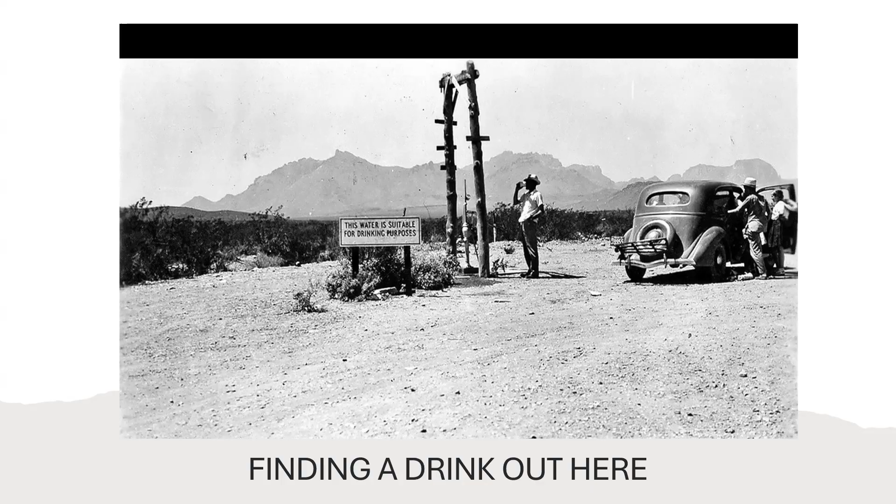This is an old TxDOT photo. Out here, there are even well service people who have helicopters, just because of the distance to get to the wells. They can take a control box and a multimeter and go out and diagnose whether it just needs the reset button, or if you're going to have to come out of the hole. This is a guy over near Dryden.

As Scott was talking about in El Paso, all these little towns out here really started out fairly simple on the water. Sanderson was a railroad town. In the beginning, there was a fellow named Wilson that went in. They tried multiple locations and drilled a bunch of dry holes, and he finally hit right there in town on the edge of Javelina Hill. So they put the whole water system right there. You can tell multiple wells close together. But before that, they were literally hauling water in barrels to people's houses, sort of like he was talking about in El Paso.

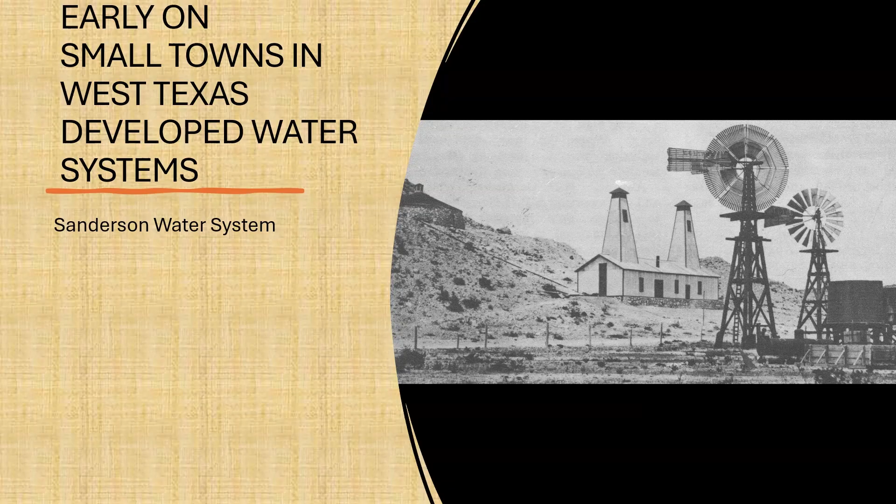Another good source, as most of you know, being in the geo class, is that many times understanding the surface geology, you can make determinations about where you're going to start. You can look for structure, which in fractured bedrock is always an advantage, and investigating this on the front end can really save you a lot of time. It can help guide where you're going to try to locate the well.

Out here, another thing that makes West Texas different is that you have all different kinds of water bearing zones within a fairly small area. So if you're based in Alpine, or Sanderson, or Terlingua, whatever, the wells can be in any of these water bearing zones. So we talked a lot today about the carbonate aquifers and the volcanics, the alluvial aquifers and the bolsons. You're going to have different drilling methods for each of those, ranging from some of those alluvial wells or things down along the river.

I mean, you could be cable tool. Some of these other projects can be air rotary. A lot of them are going to be hammer. Understanding what it's going to take, what type of equipment it's going to take to drill the hole, also what the hole diameters are. Again, if it's a public supply well, once you start trying to drill a large diameter hole in some of this alluvium or these bolsons, it can be an adventure.

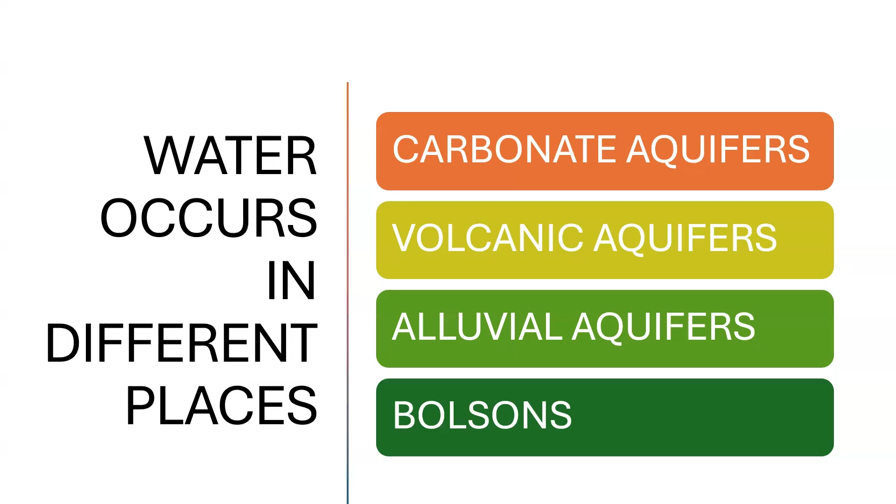Once again, a lot of you guys are very experienced in doing the groundwork ahead of time. Water Development Board groundwater reports—Rusty and I were talking earlier about a lot of this work being done back in the 40s and 50s, and they generated a lot of really good reports, well records, things like depth and material encountered and water levels. That information was really good, and those reports were really good. So accessing those, looking on the Water Development Board water well database, I think everybody in the business here knows about researching that. The information is sometimes very good and sometimes it's not, but at least it's a start on trying to figure out what you're going to get into.

Going out to these ranches and talking to them, looking at their owner records, they range from everything. Some of them have wells that were drilled back in the 50s and 60s. They'll still have the original receipt showing depth, materials that were placed, records of pumps they've pulled, equipment that's been replaced, wells they've plugged. All that information is available. Some have absolutely nothing—if they've changed ownership and things like that, a lot of times that doesn't convey.

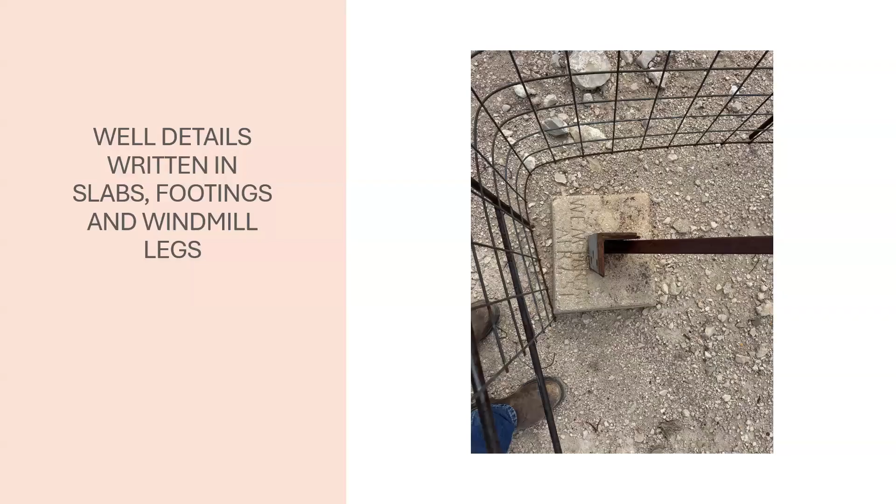In fact, most of the time it's not there, but sometimes you're lucky and you find something. And of course, as always in this business, it's talking to people. Talk to the guy that's been operating. A lot of these ranchers out here lease these places, so they came in after the water system was already built and had been operated for 40 years before they got involved. But they know which wells are operational, problems they've had with them, and kind of what to expect in a certain area. Sometimes they don't know anything, but it's always nice to visit with them.

Then you call Joe Vickers, right? Call Joe and say, hey, what do you think? This is where we're going to work and what we're going to do. And he's always a wealth of information. He's a fellow over in Central Texas who has done a lot of work all over the state, a real wealth of knowledge.

Now I want to talk about a project I got involved in years ago, down in South County, South Brewster County. They put together the Study Butte Water Supply Corporation because they had no centralized water system down there. I guess there was one old well near the Starlight that supplied basically the whole ghost town, and people hauled water in barrels for a long time. As the population was growing and businesses wanted to grow, they got a loan or a grant, I don't know which, from USDA to drill a new supply well. That was in '98, and we got the contract to go down there.

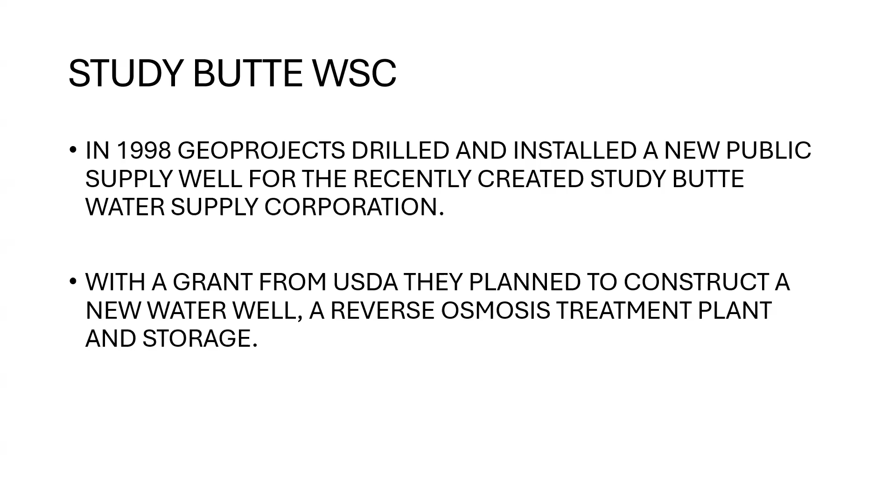Again, there was a lot of good geology information because everybody likes to go down there and look at the geology, but there weren't a lot of records about wells and what to expect. So it wasn't a wildcat, because people did know some things, but nobody had drilled a well there and hit and made a public supply well, and they didn't know anything about volume. So they got a grant to drill the new well, build an RO plant, and build a couple of storage tanks.

Several people, Kevin included, have talked about the stratigraphy down there at the surface where we drilled. We started in the Boquillas - I don't know which member of the Boquillas it was - went down, and we anticipated going through the Buda. Normally you can tell when you're going through the Del Rio, because the material is significantly different than the Buda. Then we were going to complete in the Santa Elena.

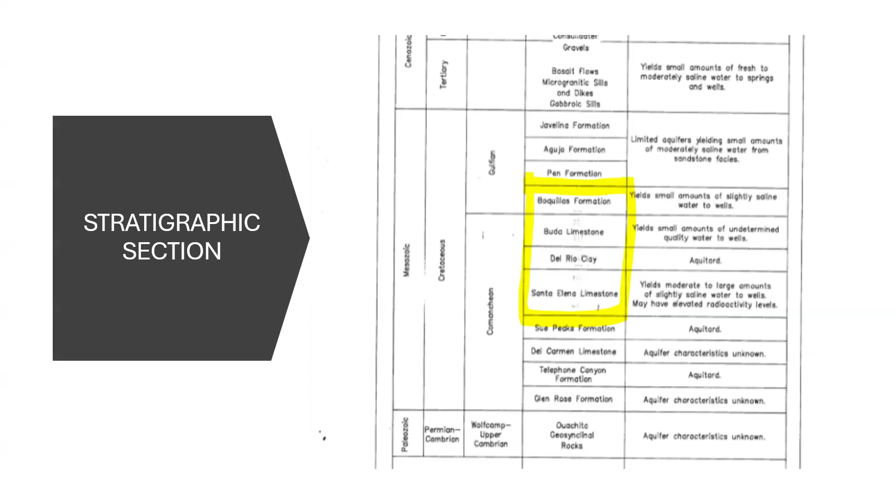So that's the section. They bought a piece of property behind the Starlight, and that's where they were going to build everything. Everything had to fit right there on this really small piece of property, and they had no power there when it started.

Well, we're starting in the Boquillas here, right? So there's something going on structurally. And so there's the Terlingua Fault. And so we were looking across, and you could see the mouth of that. And that was going to be what turned out to be about 800 feet below where the rig was set up.

So we drilled a 6-inch or 6 1/4 hole to 1160, which was, I think, the contract thing. Well, we hit water about 900. We never circulated very well. It was fairly weak on returns. We didn't have any trouble making connections or any problems like that, so we weren't afraid of getting stuck.

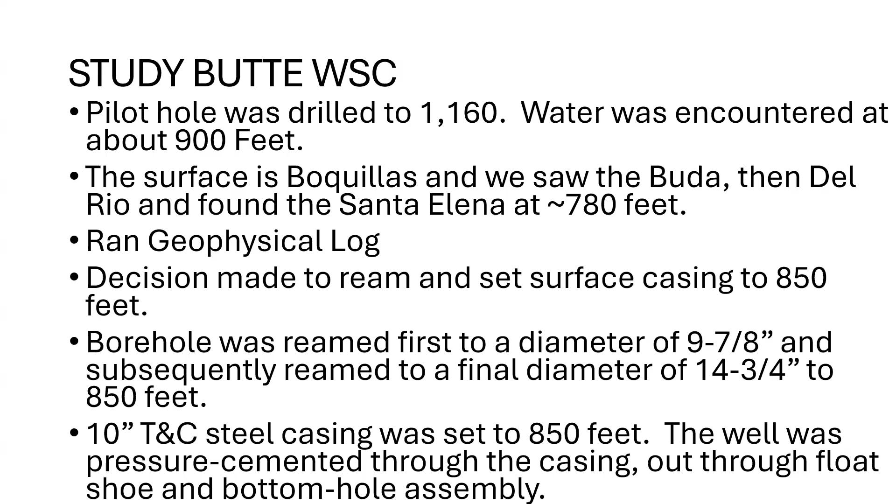We drilled it with a 9 7/8, and then we came back with a 14 3/4, and then we ran that 10-inch in there and cemented that. Of course, all that fractured bedrock down there, there's no returns. And so top off was an adventure. We put a lot of cement as top off on the backside of the casing. After the cement cured, we drilled out with a 9 7/8, and we went on down to 1160.

And again, we had not a whole lot of returns, and so we didn't really even know how much water it was making. We were running enough back pressure on the system we knew we had water in the hole. We just didn't know how much, or if it was going to meet the capacity that they wanted for the system, which was, I think, 150 gallons a minute. So after setting the casing, cementing that, TD the well and everything, when we put the test pump in there, we didn't know what it was going to make, which is common out there. That's not unusual.

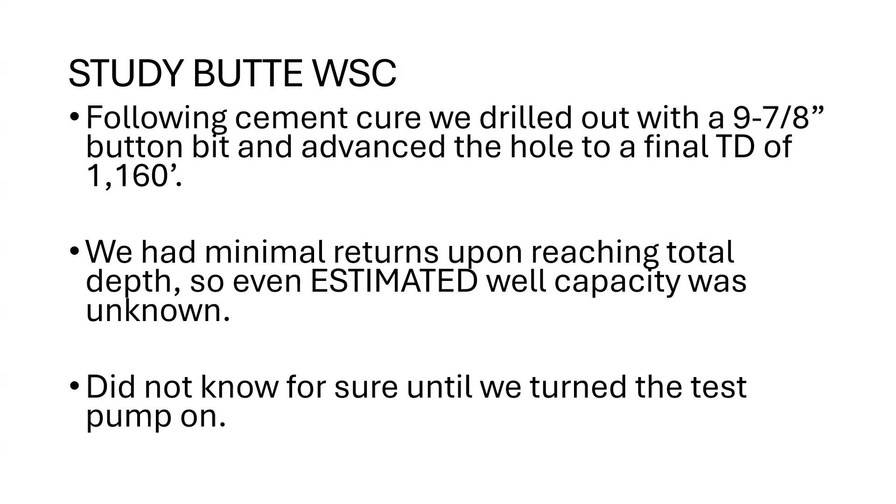So there's the state Texas well report, state well number. So the pumping test, we had to do the 36-hour because it's a public supply well, and they wanted to pump it at twice the design rate. So we went ahead and we brought the test pump to make the 250 gallons a minute. We set the test pump. I'm pretty sure it was on 5-inch drop, set that, and set it just inside the casing.

And we started the pumping test, and it turned out to be a good well. We had about 11, 12 feet of drawdown after 36 hours. And we found the water temperature at about 110, and that really became the biggest problem that we had to encounter, that water temperature and the crappy quality. I think it was like 2,500 TDS water. But again, right? Bad breath is better than no breath at all.

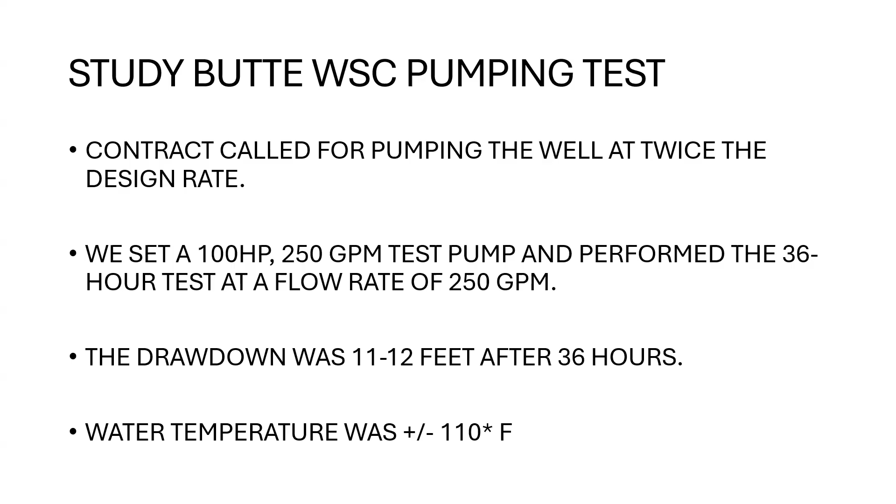And so we started coming up with our permanent pumping equipment design. We had taken into consideration that it was hot water and fairly deep. They wanted to use the permanent pump. At least initially, they were going to drive the RO unit with the well pump, which meant we had a lot of excess pressure at the surface.

So we ended up, it was a 100 horsepower motor we had on the test pump. So we ended up just derating the motor for the permanent pump. We just put the 100 horse motor on a smaller capacity, 125 gallon a minute pump, and that worked good. In fact, there's more to the story to tell you, but it turned out that instead of a bunch of wild high temp motors and things like that, an oversized derated motor, shrouded, was probably a better install.

And in that time frame, the variable frequency drive was just barely coming into being used on submersible pumps, and the power company required that we had a soft start, because if we tried to load that motor on that line, it was going to create a problem with Rio Grande Electric.

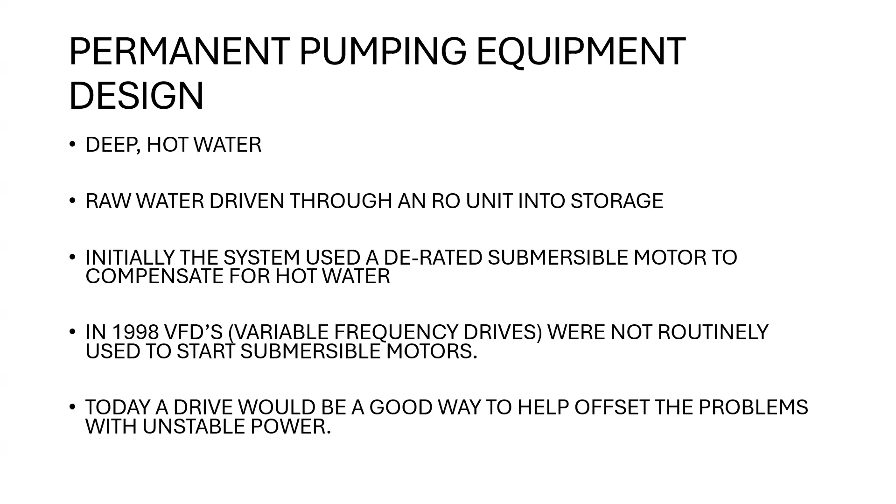So we get all this stuff, we get all this equipment, and we take it out there, the soft start and the pump motor. We pull the test pump out, put the permanent pump in there, and we start trying to operate this thing. And we had the soft start had protection on it.

And this is, you pump installers, you know what I'm talking about. The big problem down there is unbalanced power. So when it's running, the amperage pull on each of the three legs of the three phase is not equal or even close. And consequently, the protection on the soft start would never let the pump run, right? It started and run like 30 seconds and then it would shut it off.

So we get the power company down there, and the power company comes and they look around and adjust the taps on the transformer, and they do all this. We're trying to help you. We're going to get this thing resolved. And as soon as they couldn't get it resolved, then what they tried to do is to figure out how it was something we did, right? There's something wrong with our pump and motor.

And they take a set of, like an ohmmeter or a megger or whatever, and they say, oh, we detect a leak down hole. And just, once again, just trying to kind of put you off.

And so they had to put a generator down there. Of course, we ran fine on a generator, and we never had a problem. We didn't have a leak down the hole, never tripped anything. But just to get going, they had a generator for a while. And we used the soft start, which we didn't need for the generator. But anyway, so again, it was faulting out for current imbalance, and the system wouldn't work.

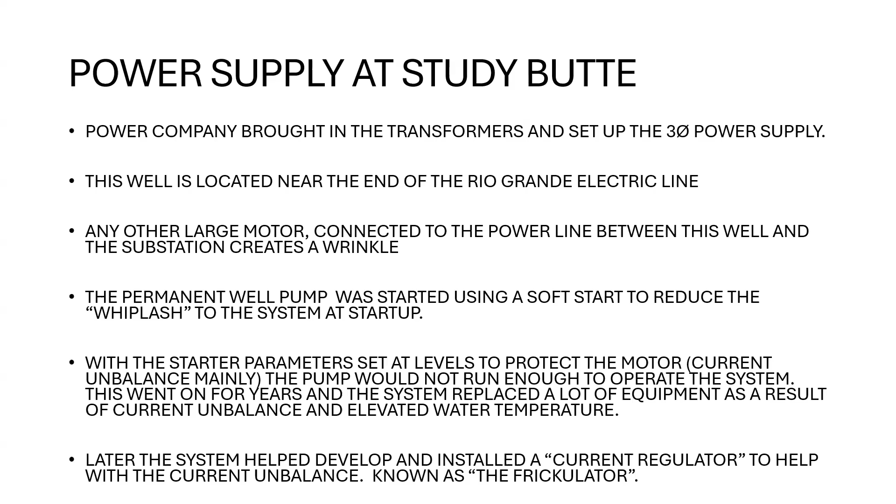So the system had a guy that was the president of the water board, a guy named Dave Fricker. Does anybody here remember Dave Fricker? He was an electrical engineer, and he was the board president, and he was just really good. He had all these patents in his name.

He comes out to the job site, we're out there putting the pump in, and he's telling us, I'm an engineer and I've got these patents and stuff. And everybody's looking at him, well, I think that's really nice, sir, but we're trying to get this job done. So at lunch, he goes home and gets the patents, right, and brings it back out to the job site. And he was one of the guys that patented the variable speed, like on a drill, like you pull the trigger harder and it goes faster.

And so these submersible motors, they're very sensitive, and there are two things they really don't like. They don't like heat because heat burns through the windings and they're shot and that's it. And then unbalanced power. And they had both of those conditions with the water temperature and the unbalanced power.

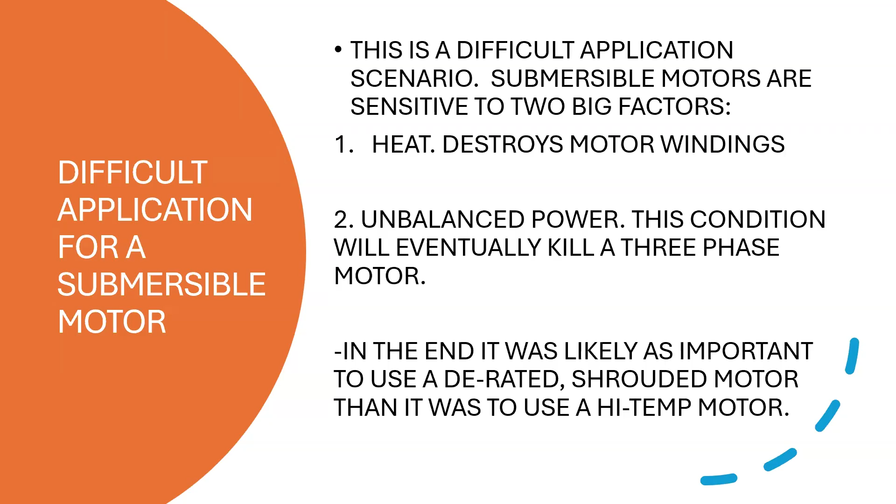So we went out there to pull that, and we got the elevators on it, and we pulled it up, and it pulled about 2 joints off of it, and the whole thing took off down the hole, the motor and the pump and the 4-aught wire that was tied to it, and went all the way to the bottom. We had to take a drilling rig out there. We fished that out, and we stopped work and said, what are we going to do now?

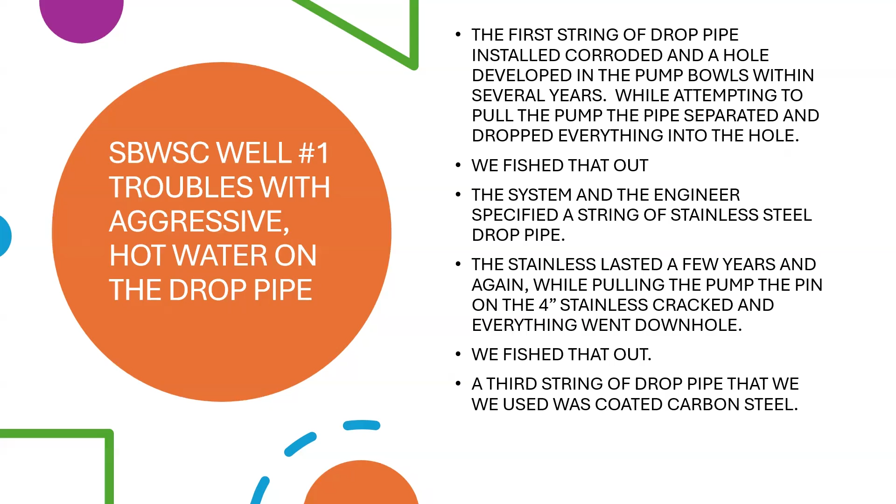And the engineer decided he wanted to put a string of 4-inch stainless drop pipe at 850 feet, whatever it was. And so we put the stainless in there, and that ran for about 3 years. And then another motor went out. Once again, same thing killing it, the water temperature and the unbalanced power. And we got that pump about 2 joints out of there, and it took off.

And so it was 3 things. It was the strain of the weight of the string, it was the hot water, and it was the chloride in the water that cracked that stainless. And so that's what happened. And that's what happened when it hit bottom. It bent all that pipe.

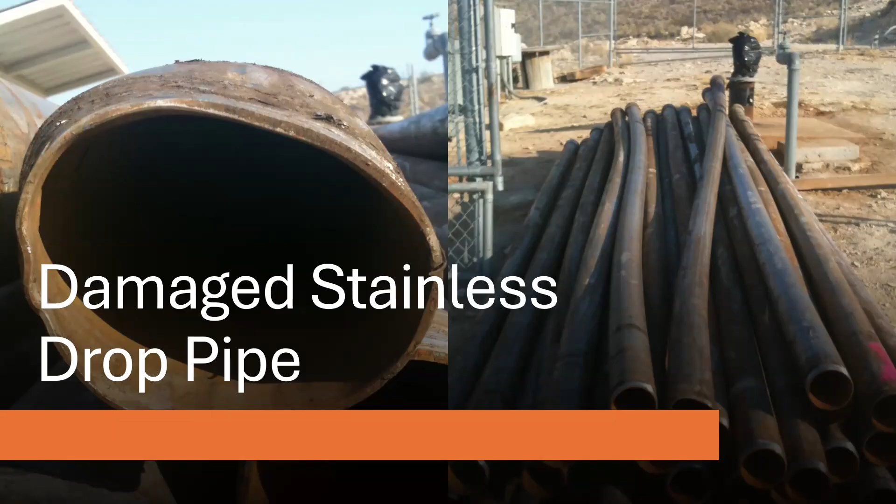So we put the coated pipe in there, and it's a real pain to put it together because, and Clark can tell you what a pain it is, the wrenches don't bite on the coating, and you have to have a special set of wrenches to do it, and you always nick it, and anywhere you nick that coating, then it just rusts right through and has another hole. You're back to just carbon steel pipe.

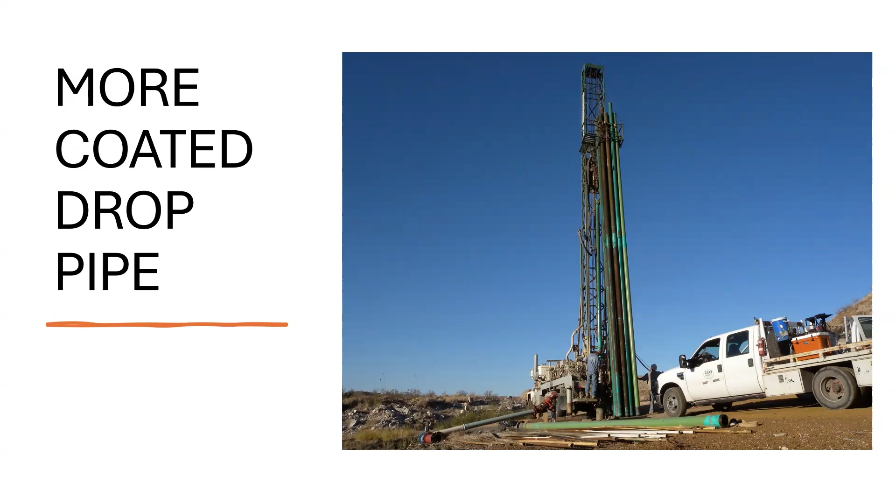So when we stopped going down there, that was the last thing that they were doing was the coated carbon steel. There's another string of it, pulled in doubles.

I'm not sure what in the interim on the starter side, on the electrical side, Mr. Fricker, because he got tired of the unbalanced power, he worked with a company. I don't know if it was Benshaw or one of those big electrical companies, and he came up with a current regulator that would take the 3-phase power from the power company, and it would smooth the power, and then it would feed the soft start, and that worked pretty well. In fact, that's what they were using the last time we were down there.

But at every turn in this project, it was something big. And again, you could probably say, well, on the design side, they should have probably done this or that or whatever. But why wouldn't you go galvanized? Well, galvanized it'd have a hole in it before you got home, right? There's no way it would work. And so it was a tough project, and I'm sure they're still fighting it. I don't know if anybody here has any knowledge about that system or how it's going.

But again, conclusion there, it's a difficult pumping environment. The maintenance will be ongoing no matter what you put in there. You're going to be pulling it periodically, hopefully not to replace the submersible motor. We did switch to a stainless fluid end, and we stopped the corrosion on the fluid end. That didn't happen again.

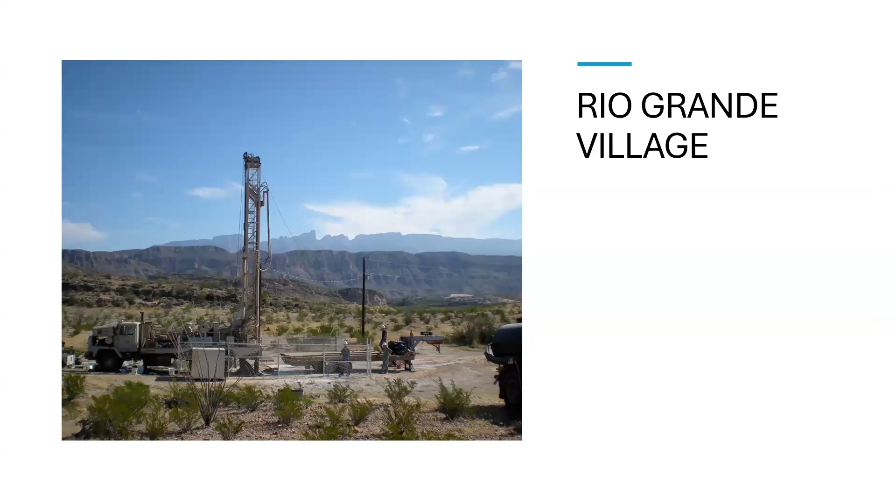And they said, hey, either you're going to get us 20 or you're going to drill us another well. So we went down. This is us. You can see the Del Carmens there in the background. This is down by, if you're going around from Rio Grande Village along the river there. I don't know if you all know that territory. I haven't been back since, but that's what I just said.

We went in, we put together an acid program. We put the acid away. We took what they said it would take and we basically doubled it. We used sulfamic because it's just a lot safer than trying to do hydrochloric. Also hydrochloric, we've had problems using it, cleaning it up and getting the metals back out of it for the water quality for the TCEQ.

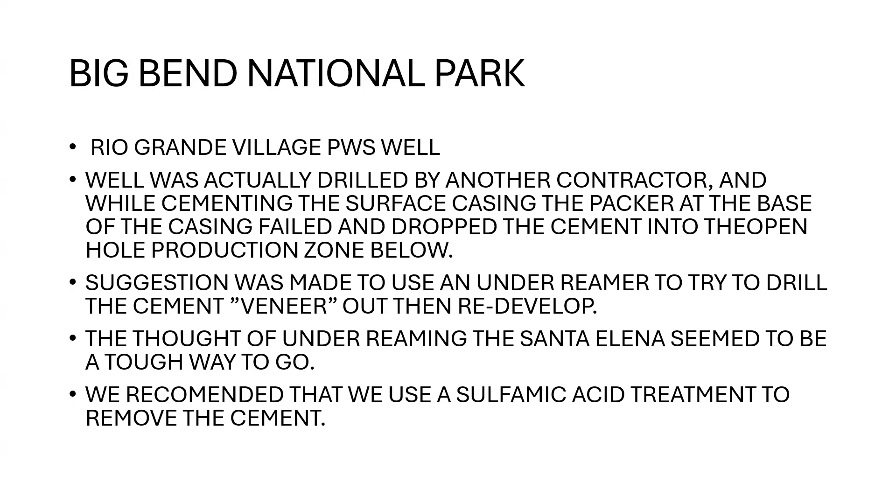This is a public supply well. So we used sulfamic, we did it, and then we redeveloped it, and we got it back to 20 or 25 gallons. And so it was a success story, and we didn't have to try to underream that thing. That's just another picture of the location. I think I got one more picture.

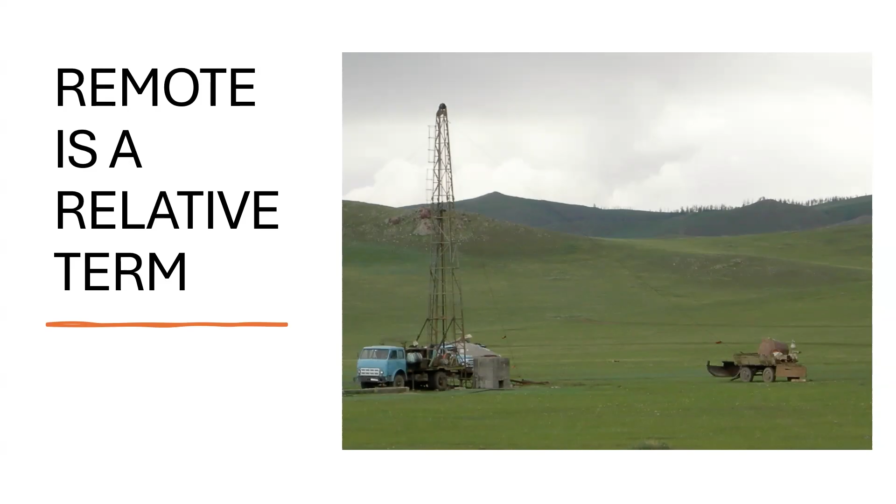And so you can see I guess that's a water tank and probably a Russian built drilling rig. Now those guys, that's remote as much as it gets. And that's it. Any questions or comments or ideas?

And we got in there and started the reaming process. They'd already drilled a test hole, and they had estimated volume, and they'd collected the samples for water quality, and all we had to do, and those are always the jobs you hate the worst. All you got to do, right, is ream the hole and run the pipe and gravel pack it and cement. That's all you got to do. So we did. We went in, we did that.

Well, what we didn't know is that when they drilled the test hole, they had hollowed out like Carlsbad Caverns down there at depth. So we kept stacking air compressors, right, trying to get enough uphole velocity to try to clean the hole. And in the end, it was an interesting resolution because the sections that were blown out were not going to be in the screen interval.